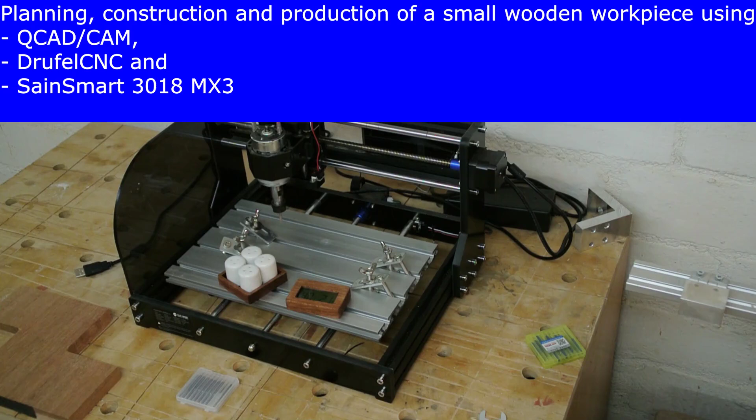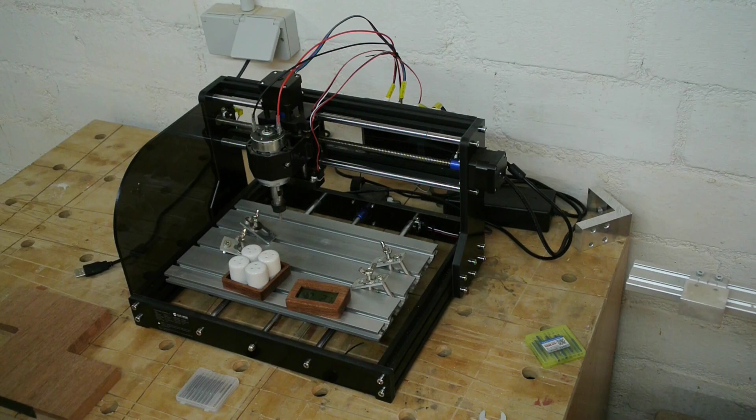Today we will produce such a salt cellar holder out of Meranti wood on this entry price segment router, which is a type 3018-MX3 of the company SainSmart. This router is to be controlled by the dedicated CNC control software.

For this we will use the DrufelCNC software, which comes at a relatively low price, also for very big files. So cheaper than the industry standard Mach3 software, which is quite expensive for household application.

We will cut the wood, such a piece of Meranti here. We will cut this with a straight flute cutter of 1/8 of an inch, so 3.175 millimeter. That is then also the lowest radius which we can have here at the inner corners of our piece. Any kind of other formats and wood formats can also be produced.

And to actually produce all this, we of course need CAM files. And the CAM files we will first of all generate, so construct the thing in a 2D CAD system, which is easier to use than all the famous 3D CAD systems. We will use QCAD. QCAD is a free open source CAD software. And out of this CAD drawing we have to produce then CAM files. The CAM files we will produce with QCAD/CAM, which comes at a relatively low price.

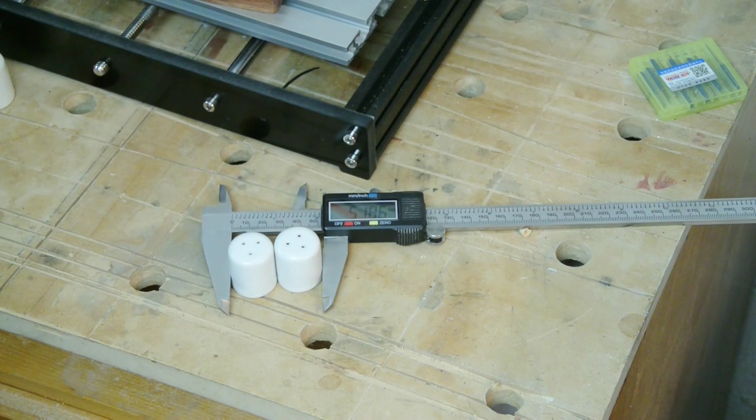First thing we have to do is take our measurements. So two of these salt cellars together have a width of around 52 millimeters. So we go for around 53 as an inside dimension of our final box.

I started QCAD already, and the first thing is we create a new drawing. Within this new drawing I normally switch off these grids, check that we use millimeter and metric system here for what we are going to do, and that we set this G-code setting here to G-code offset millimeter. So only with this setting we are able to generate valid files for the execution in DrufelCNC.

And if you change this after the point in time where you have constructed your first toolpath, then you have to repeat generating and setting all toolpaths after this again. Especially for the toolpath setting at entry points, this is also crucial. The behavior of the CAM module within the QCAD is different based on this G41, G42 part here, which you see. So this one, in millimeter, and the offset one. So please make sure you don't forget to set this setting.

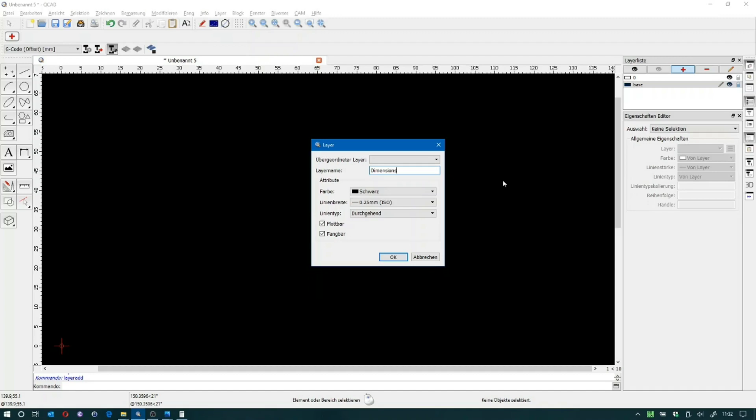Okay, so next thing that we do is we create two layers. First of all, a base layer in which we will put all the things that we draw, what in the end will be visible at the final piece that we keep in our hands, and we will enter also a dimensions layer in red here, and we make sure we draw to the base layer by selecting this line.

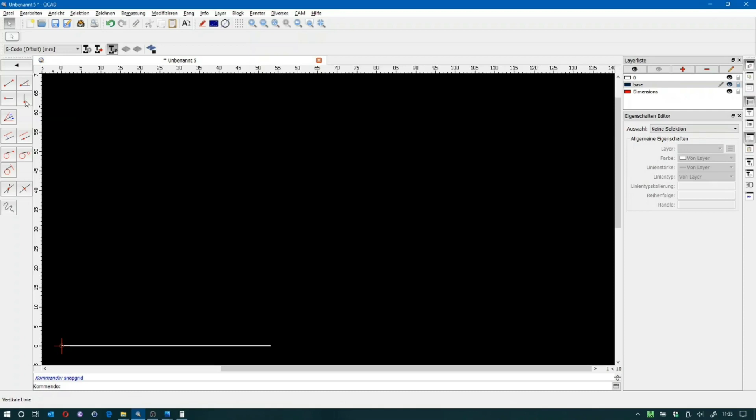First construction is now to have a line of length 53 millimeter, which we will start here at the 0 point. You see at the moment it doesn't snap, so we switch on here this snap to grid mechanism, and we have our very first point set. Can press escape to get out of this, and we select now a vertical line with the same length of 53 millimeter.

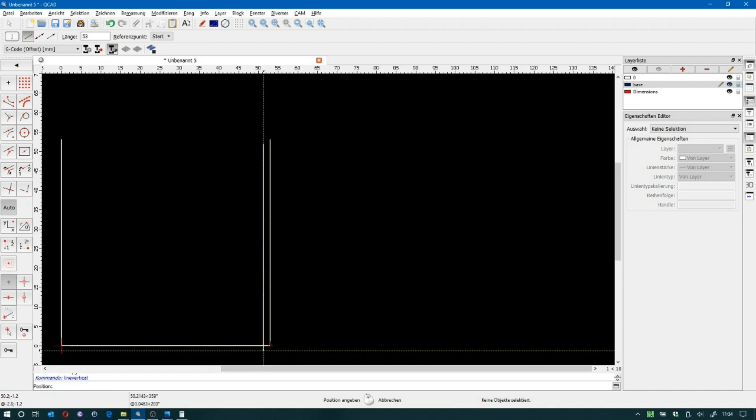And for this, you see there is nothing special selected any longer, and by this QCAD now snaps to the ends of this line, which is very crucial that you see this word end here before you give a click, and then you are sure these lines really match together. So we construct these two vertical lines, go back another horizontal line, and we are done with the inner of our salt cellar holder.

So now we want to draw the outer dimension. For this we use the line parallel mechanism, and we want this in a distance of say 4 millimeters.

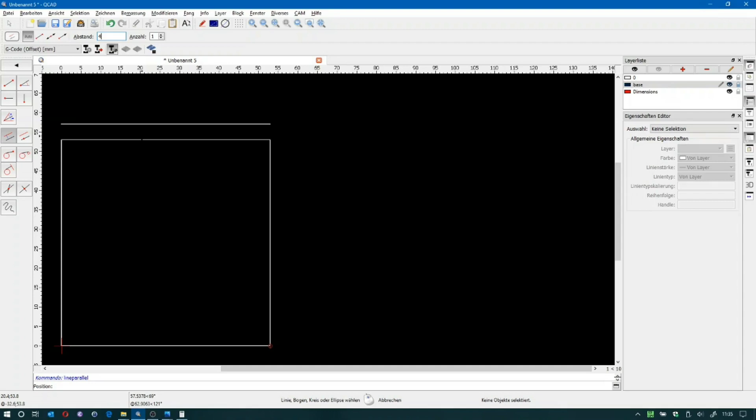So we have selected this, given our distance here, and we hover near to this line, and you see it is now, if we click, drawing a line to the outside. If we hover to the other side, the parallel moves to the other side. And you also see that the line it is drawing a parallel line to gets a little bit darker. So we click here, here, here, and here, and have our parallel lines.

Now we want to zoom to all to see everything centered in the middle, and press escape till this all cleans up and we come to the main menu again. So now we want to have roundovers here, or if you want to have sharp corners, you can go here and use this trim, trimming both, and have sharp corners by selecting these two. So you would click here and you get sharp corners, but for the moment we want round corners.

The question is what kind of rounding we want, and that comes actually from our router size. So the router later will move up here till this point and then make its way and leave a round corner here with a radius of half of the dimension of our router. So let's see what this means.

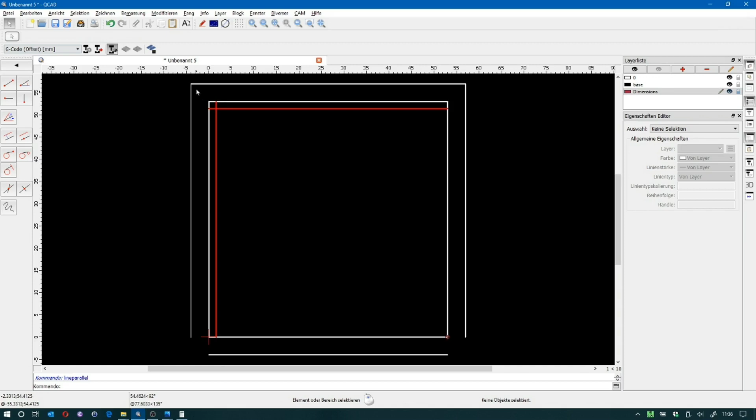Again, I draw a parallel line, and this parallel line is now 3.175 millimeter divided by 2, which I can put here, and I construct two lines which help me to find the center of this. So the router will end up here. I can also depict this by drawing a circle here with a radius 3.175 divided by 2. So this will be the roundover in our inner corner in the end. And what we want is now that we have a rounding that goes like this.

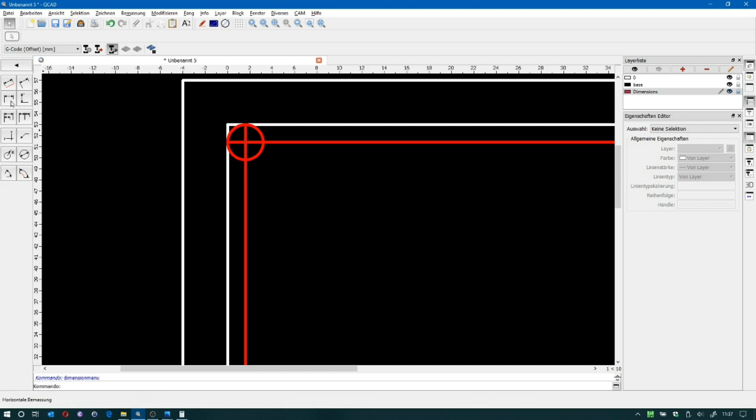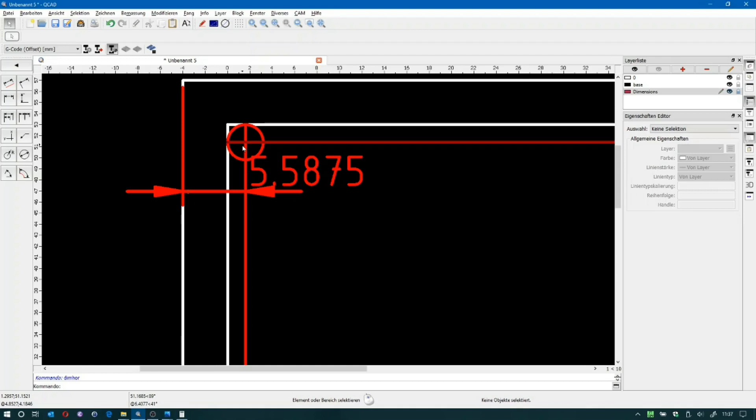So the next thing that we do is we measure this distance, come to this menu, and we draw now this kind of distance marker here, horizontal distances, and we see that from this line, the distance to here is 5.5875 millimeters, which is our 4 plus half of the diameter of the router bit.

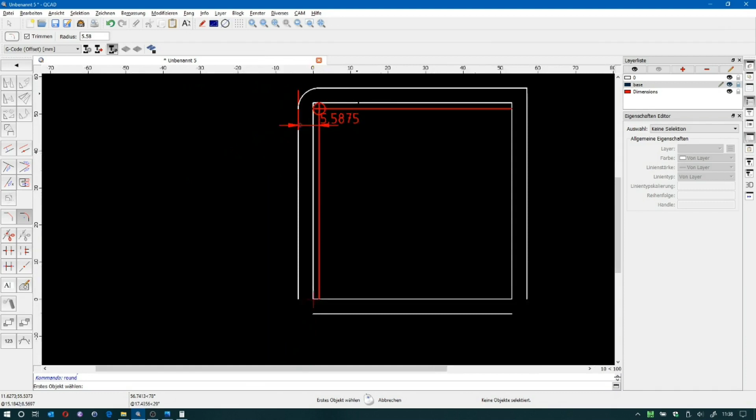So now we change back to our base and we give a round over to our corners. So we type in a radius of 5.58, select these outer two white lines and get the round over, and do the same also on the other sides. Then you also see you don't even have to trim any longer before, and that's it. We can zoom all and make the dimensions layer invisible, and here we have the outer base of what we need.

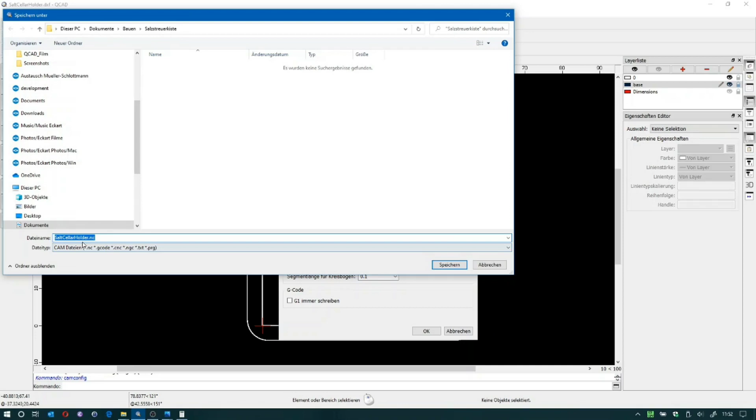We want one toolpath that runs around all this corner, and for this we start to build our CAM setup. So we start first of all with CAM configuration and set the output file. That is the directory, and it offers us to name this the way our original DXF file is called, and that is okay for us. You can optionally give a number for this if you need different tools later on. That can be handy, so I name it 1.

And there is a security layer here, so the height at which the cutter head shall end up to do a change of cutters and at the end, and we choose this to be relatively near to the top of our surface. Around 2 mm are definitely sufficient, since our SainSmart router has only a very limited height in the Z-axis. It does not make sense to take very big values here. All the other settings I keep the same, but the G1 I want to be written all the times. So this is the setting that I use here.

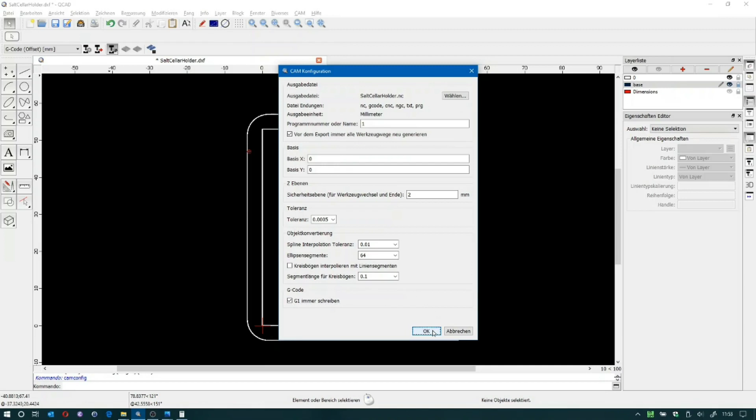To create now the first toolpath, first of all we have to define a tool itself. So we have this menu here, and there is the tool list and the so-called tool path list. The first thing we do is define our tool. The tool is a straight cutter head of 3.175 mm dimension. For the spindle speed we use a value of, let's say, 20,000, which in the end does not make a big difference. I couldn't see any effect of this really in DrufelCNC. Anyway, 20,000 rounds per minute is not reached by the spindle of the SainSmart router.

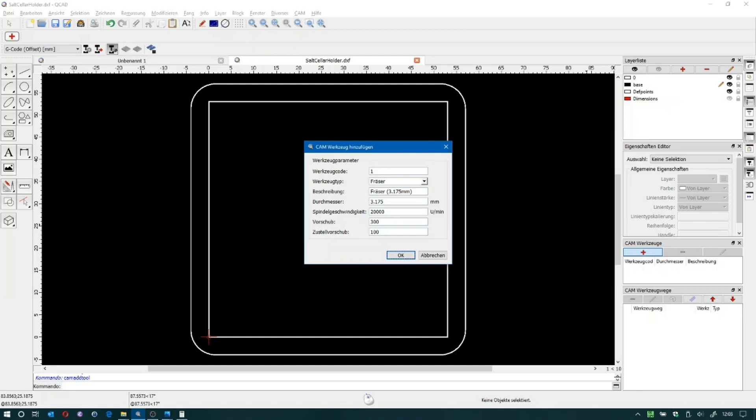So for the linear speed we take now a value of 300, and for the movement in Z direction 100. These values come from experience for the material which you work on. So these were settings which worked with my Meranti wood. So by defining this, we have now this tool defined.

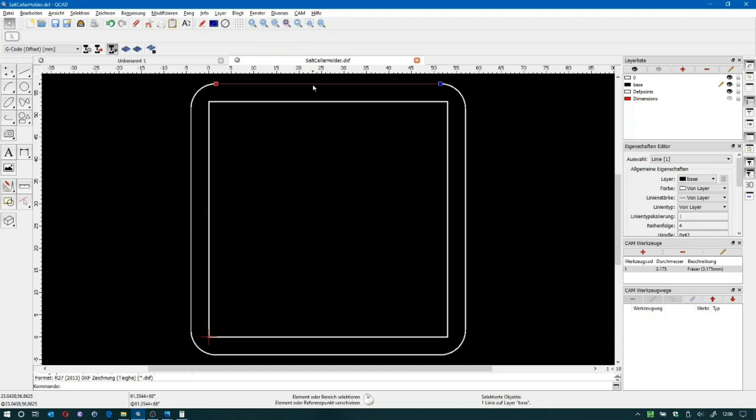Now we have to create the first tool path, and there is something we have to know about the selection mechanism in QCAD. If you click on one of these pieces and then right-click, we get a different context menu. Then if we have no selection and do a right click on this, so that's what you want to do now. You want to only right click on this and select the complete contour here. So all these things get selected.

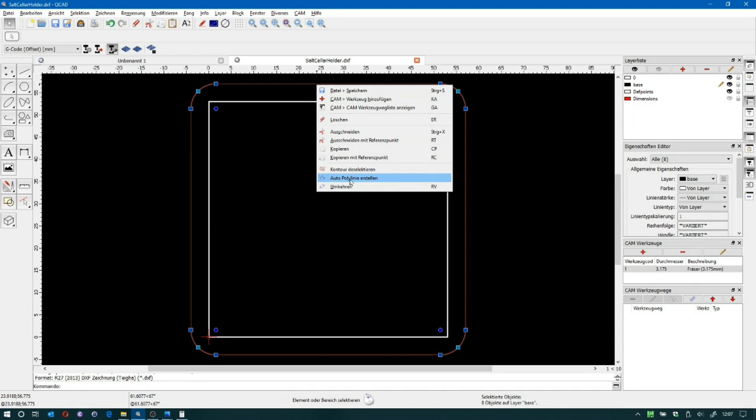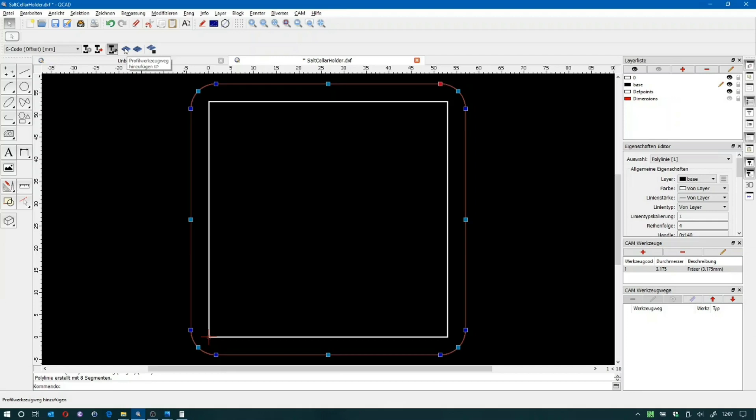And the next thing is we create one object out of this, and that is what we do by creating a polyline. This now leads to the effect that we have one object, one complete set of lines here. And for this line we will now create a toolpath. So after we define this polyline, we can create a tool path.

For the tool path, automatically the router tool which we created is selected here with its values, which is good. So this is again the security layer, the height of the tool at the starting point, and the cut start area is at 0 mm, that is the top, and we want to cut down to 15 millimeters, and we want to do this in, say, around 9 cuts.

Also this value comes from experience, so that is what you have to try out. It depends on the quality of the cutter heads which you use, on the spindle speed, on the material which you have, but these values were okay for me. Maybe we could even use an 8 for 15 millimeters, but okay, we go with this 9 for the moment. We want to cut on the outside, and we want to cut in the direction away from the material.

So that's good. And especially for this, we don't want any approaching tool path or a path to go away, and remember this G-code offset setting here; this G-code offset allows you to have no tool pathway here. If you come with this G41, G42 stuff, QCAD behaves in such a way that it forces you to have one of these, and by this on some materials and in some situations you cannot create a valid toolpath without cutting into the pieces that should not be touched, so into the things which you want to keep.

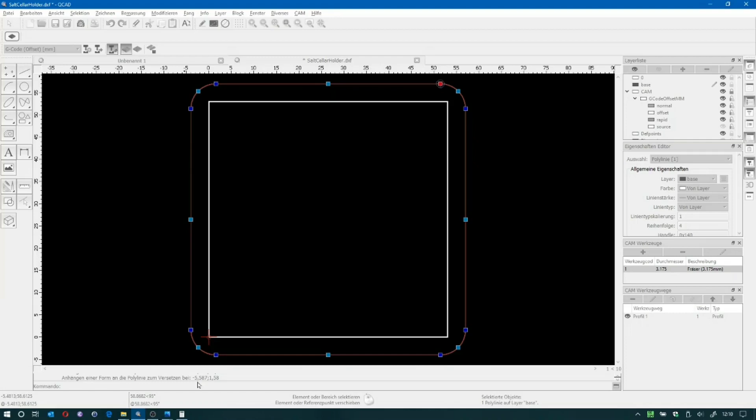So it was very crucial actually to select this G-code offset, also due to this behavior of QCAD. So I don't want this here, it should be really set to no, and that only works with G-code offset. So now the system works, you see it is running here and calculating, and after some seconds we see our first tool path, which is okay.

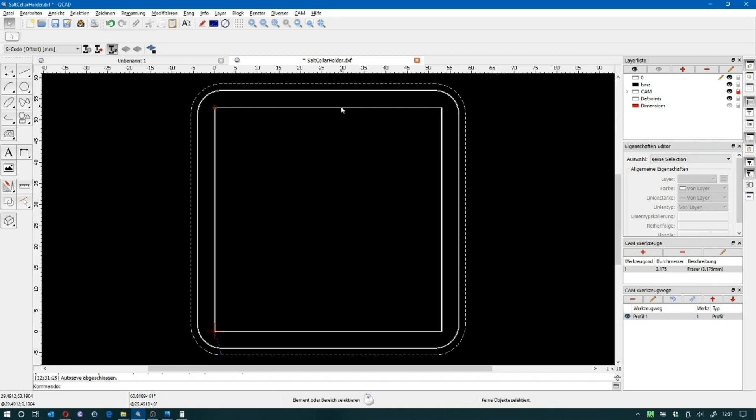The construction of the outer tool path was relatively simple, and for the inner tool path we have to do some more considerations. So the first thing we do is also here create a polyline out of this, so we have one object, and we want to hollow this out. The tool passes are constructed alongside a path, as we know, and we need passes inside this complete area. And that is what we usually get if we add a hatching to something like this, where we can select a pattern and fill the area.

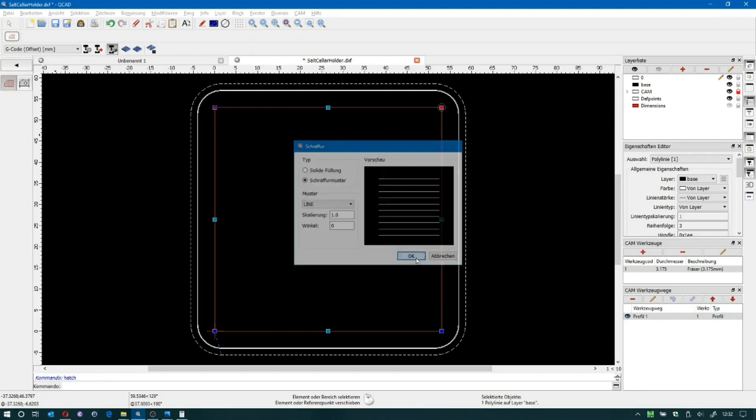And if we would do it like this, that would hollow it out, but we run into a big problem. The problem is that here at this point, if you remember, at the beginning when we constructed it, we saw that the router goes this way. If we would now create a tool line that follows this hatching line, it would definitely cut till here, and the router bit would cut into the piece of material which we want to keep. So we have to do the hatching with an offset that is about 3/4 of the outer dimension of our cutter head.

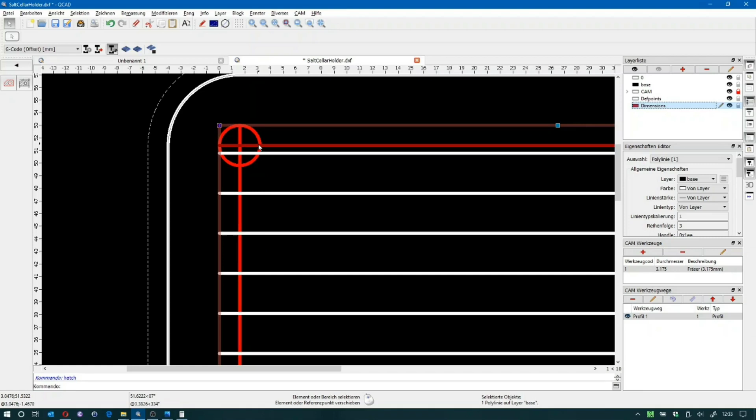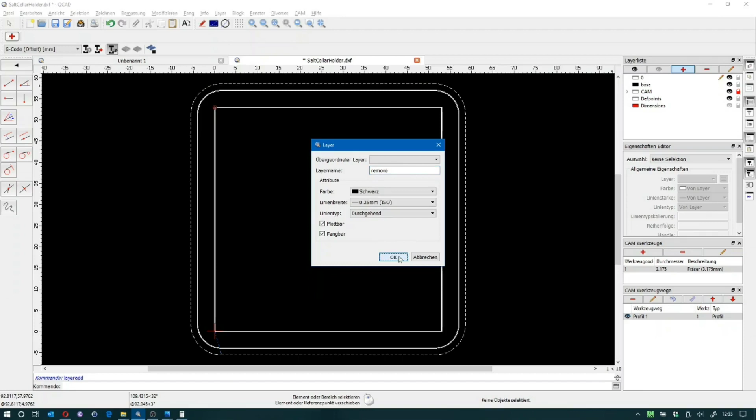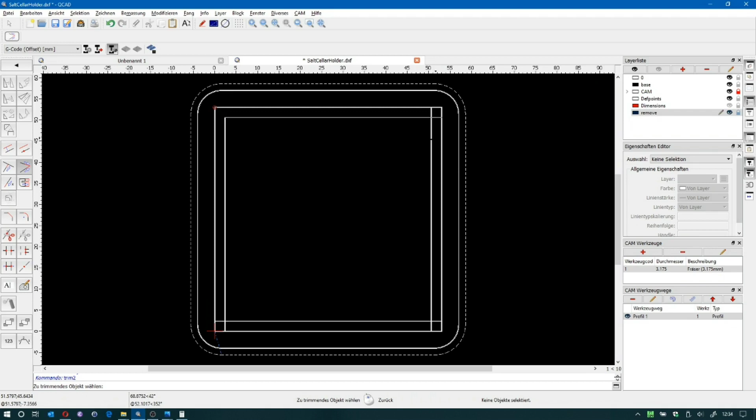So I revert this last change now and get rid of this hatching again, and first of all we will construct some offset lines in a new layer which I call remove. Select this for drawing. Line parallels with 3/4 of the outside dimension of our router bit. So somehow like this, parallel lines as shown before. Now we trim them with this trim module to not touch anything on the outer.

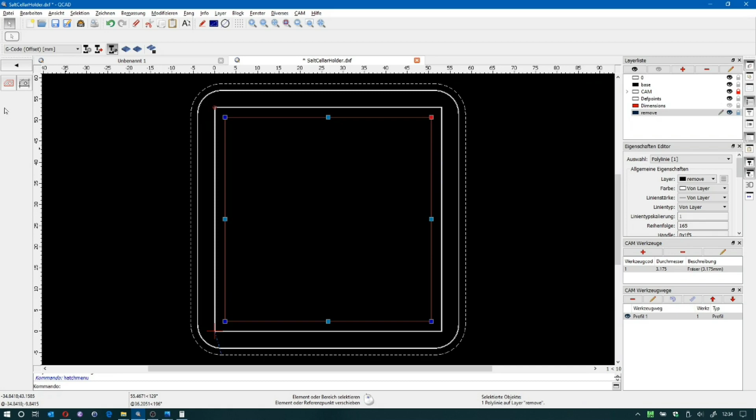And now we have an inside dimension. Select this, create a polyline of it, and we fill it also again with the hatching.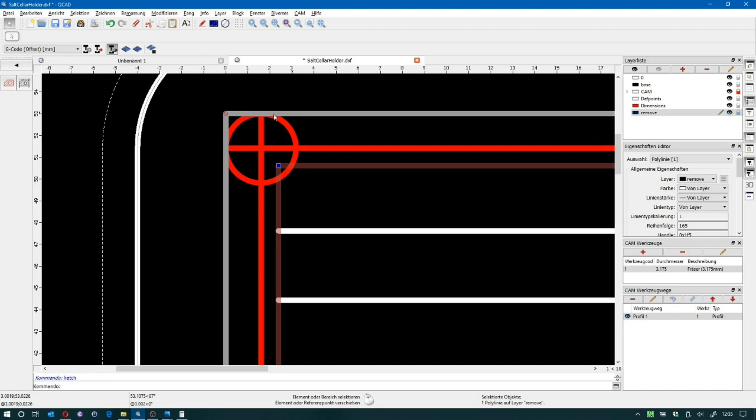So now what will happen is, if we look again at the corner here, if a router has its center here, it will not touch the outer line here, and we can construct two lines or tool passes along the hatching completely. And after we have done this cutting out of the hatching and the inner contour here of this contour, then we will still have a small piece of wood left here, which we can cut out then in a final tool pass, leading to a clean edge.

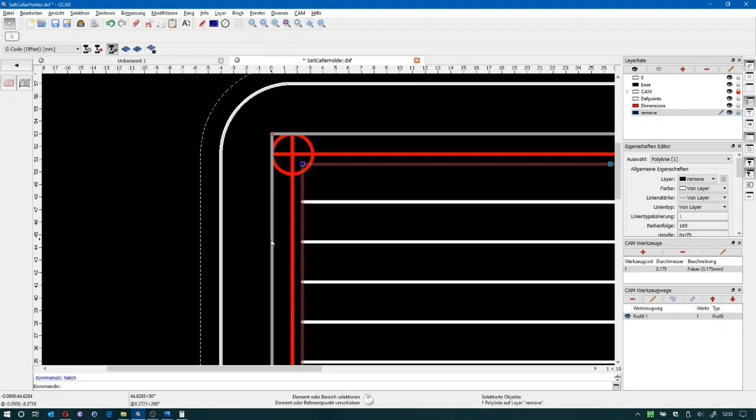Before we can start to construct the tool pass, we have to do one more consideration, and that is on the distance of the lines here. We did not control this at all. We simply said there is a scaling of 1. We have to somehow find out what is the distance here, because if a cutter runs here along this line and also here, the distance between the lines should not be bigger than the diameter of our cutter head.

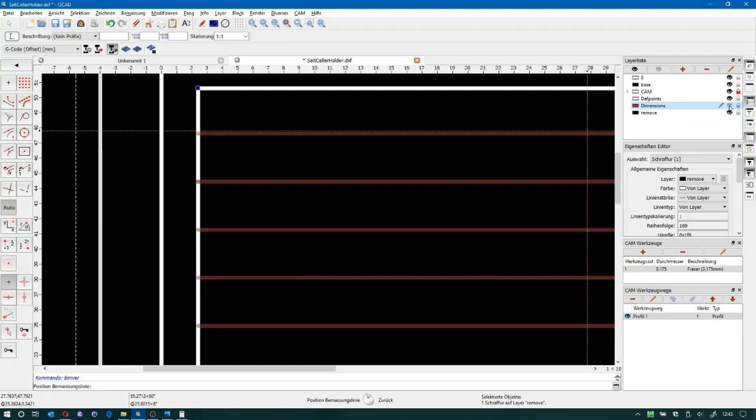So what we do now is we measure this distance between the two lines. We have to get these dimensions visible, and what we see is that we got exactly the diameter of our cutter head. So then we have no overlap at all. That is not too good.

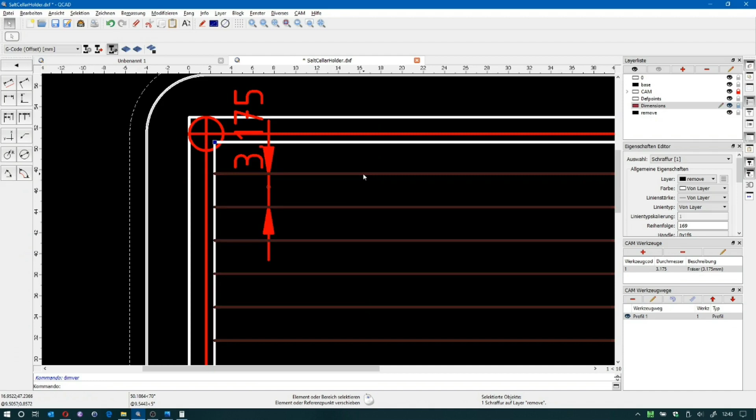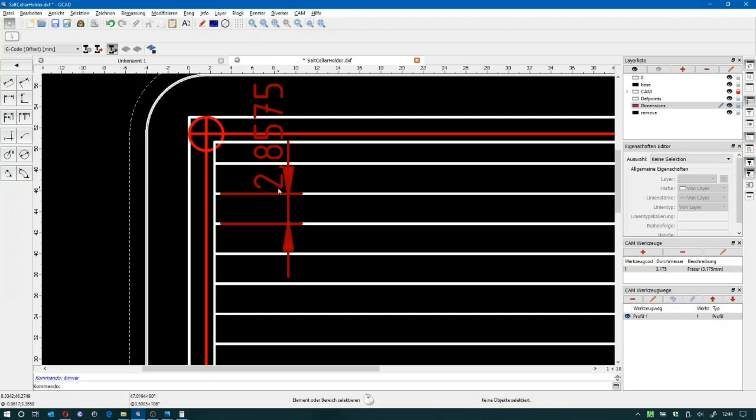So what we do now is we edit the hatching and say the scaling is 0.9. Let's get rid of this again and redo our measurement from here to here. Now it's 2.857 millimeter. That is okay because it's a little bit smaller than the 3.175 of our cutter. Okay, so we remove this again and we check that our hatching is useful now.

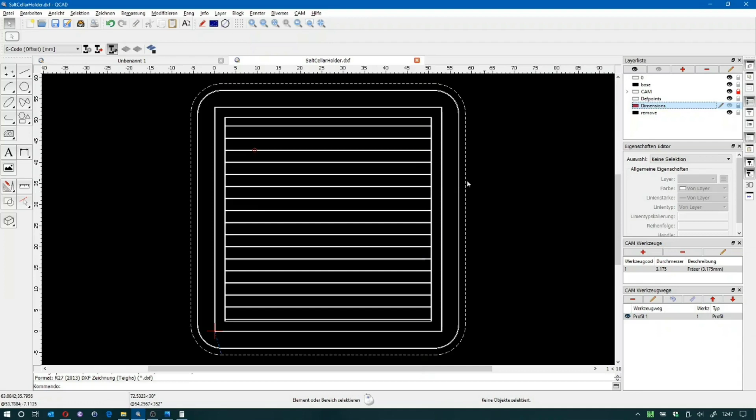Next step is now to construct tool passes, and what we want to do is first of all hollow out the area. So we can select the hatching, say we add a tool pass, we keep our setting for the tool itself, starting point is okay, 0 is our starting point. We want to cut down to 10 millimeters. We do this in say 7 cuts, and we'll do this on the lines of the hatching without anything here, so that's okay. This will be calculated now. That is profile 2 now.

Once we have done this, we select the outer area here, add another profile. We again run on the line. We want to cut down to 10 millimeter in 7 cuts, and we do this in the opposite direction away from the workpiece. Now that's then the next thing.

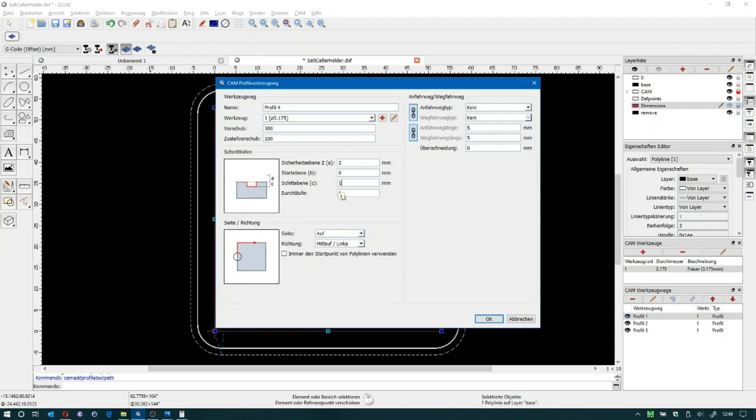And finally the real last cut, where we want to have a good result which is visible later. We again go down to 10 millimeters in 7 passes, and this we finally do on the inside in the opposite direction. So that is then the last cut. So now profile 1 was the one on the outside of everything. I will move this down to be the very last cut which we do. So we start with hollowing out most of the material, then doing this cut once around, then doing the final passes on the inside, and finally the outside of everything.

To check the result of what we have done, we look now at the CAM simulation of our toolpath. We can control here the speed, and we should not set this too high, and here we can move around the different steps. And if we start this now, we see that the router bit will move here along the tool passes for the hatching. They will go 7 times for each line, so that looks okay. And we also have a look at how far it goes to the side, how near it comes to our line here of our good or kept material, and that looks all very much okay.

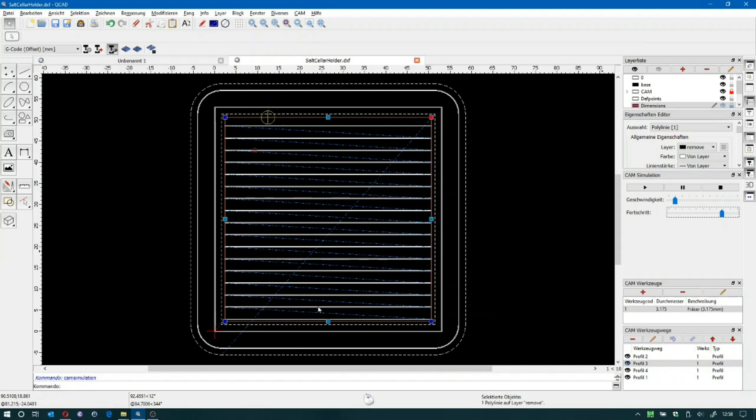So I can move this now to the front to check the end here. Also that is fine. And after it has done this all 7 times, it moves now on the inner contour here, and you see here this cut will be really into the material. On the others, most material will have already been removed, and it flattens then all these shapes which we have here at the ends of our tool passes. So also this takes some time, run 7 times around, then we'll do the inner final cut, and that also looks nice.

On the inside corners, no overshoot shown, everything okay. Then we have to wait to see the very end on the outside. Move there and goes on the outside, so that all looks nice, and more or less we are done with what we can see here.

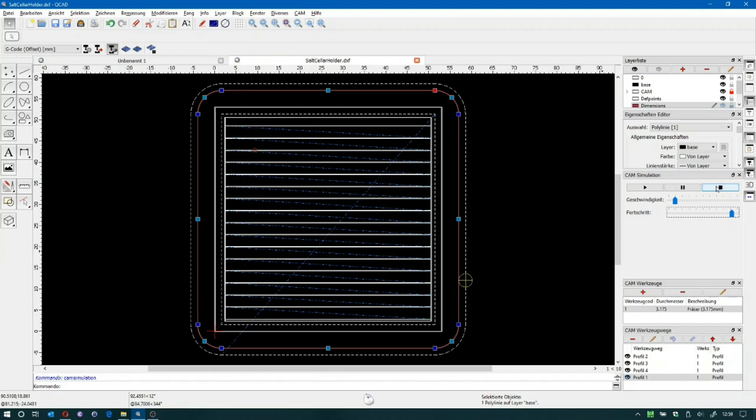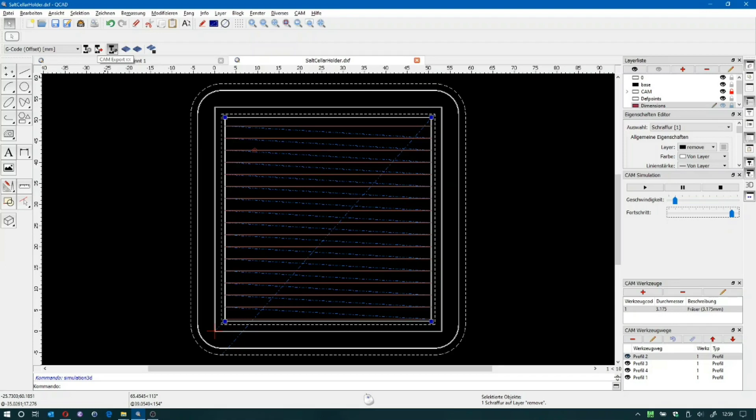QCAD also offers you a 3D view of the tool passes, but I did not find this too useful for my purpose, so we won't go into this. It has a very similar approach to this two-dimensional visualization.

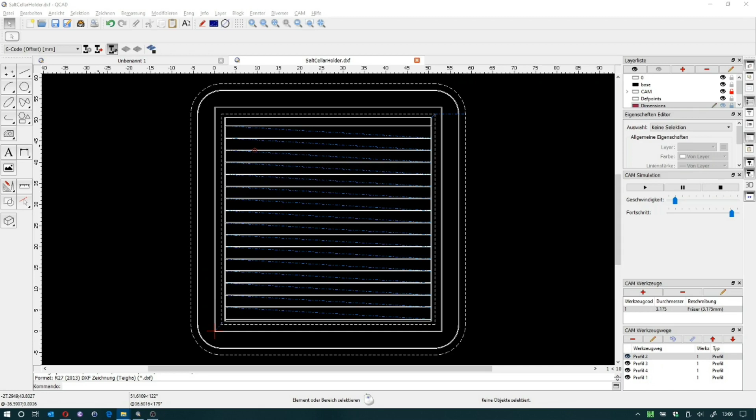Final step is now in the CAM system to export the file. That is done by pressing this button, and now all these tool passes are recalculated before it finally writes the file. After saving the file, got it here in our directory, and we can go and fire up DrufelCNC. We simply drag and drop the file here and see already that the file is also visualized here.

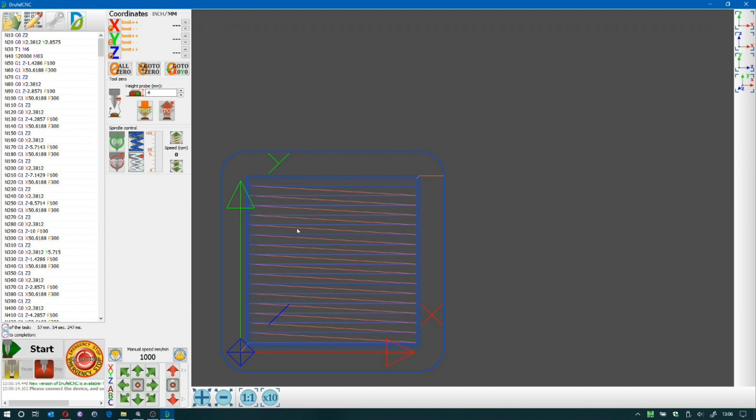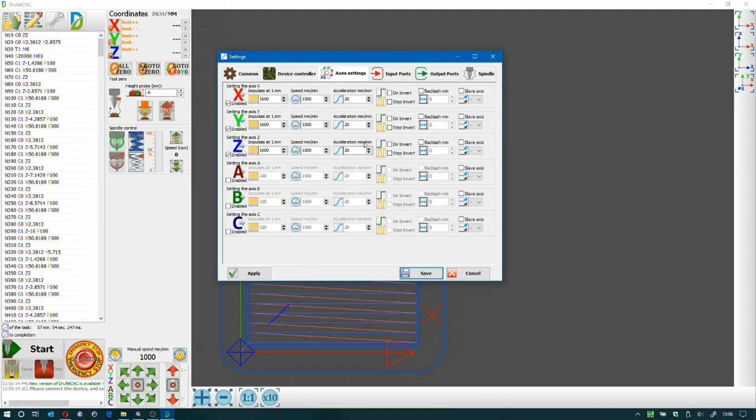That all looks good, and we can now go through the settings which are required for our SainSmart router. So we have axis settings here to be done, and well, these are all straightforward. If you need the settings, pause the video and check it. These are figured out from different videos and will control our router.

So here is the spindle speed. Since we have given 20,000 rounds per minute, that will then end up in the highest possible speed in the end.

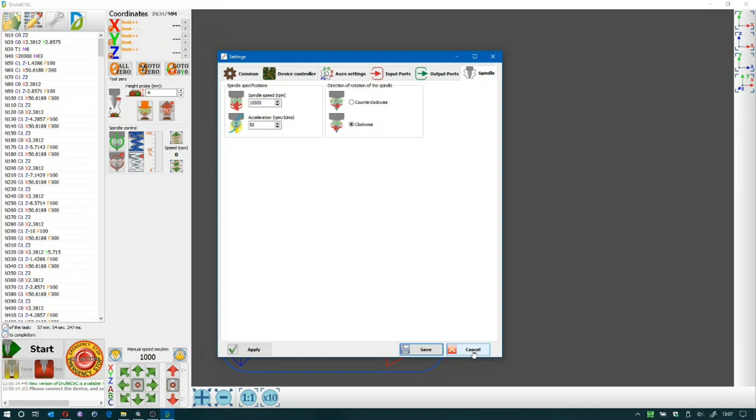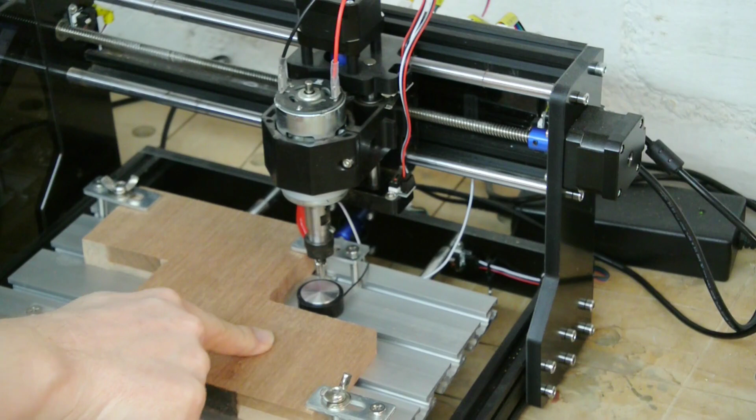The first thing on the router is to set the 0 position of the Z-axis. So I have my workpiece, which is 20 millimeters thick, tied to the bed, and I have the 14 millimeter height probe on the bed. So the effective height of the probe in this setup is -6 millimeter, which is the 20 minus the 14. And I will run the find program for this -6 millimeter here till the 0 position is found.

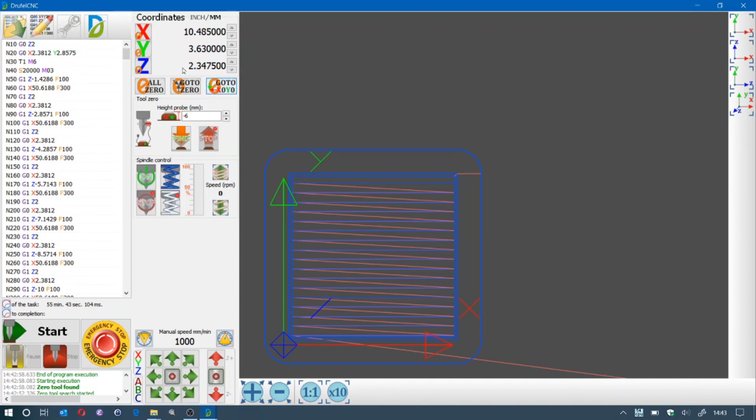And after I've done this, the next step is now to put this away and to go manually to the starting position of our cut. So this should be fine like this, and here I zeroed my X and Y axis, and now from setting point of view I'm ready to go. What is missing is the dust extraction.

And there is not more to do than this, and now to start the execution, and that will run for around 55 minutes. I doubt that I will be able to capture all what is going on, but we see what happens.

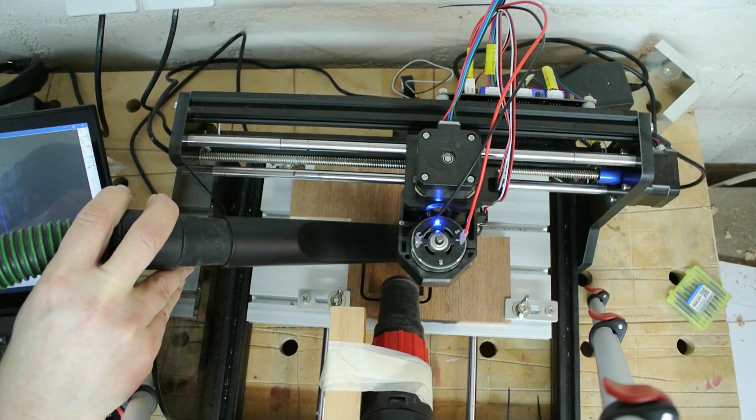So, cutting is finished, and we see that we have a small breakout here in this area. We have to see what we do with this. Maybe we have to cut it down, or maybe we simply have to repeat the complete process. But what is obvious is that all that we constructed within the QCAD system turned out to be right. We did not produce a problem from what we cut and how we arranged it. So overall the result is quite as planned and as expected.